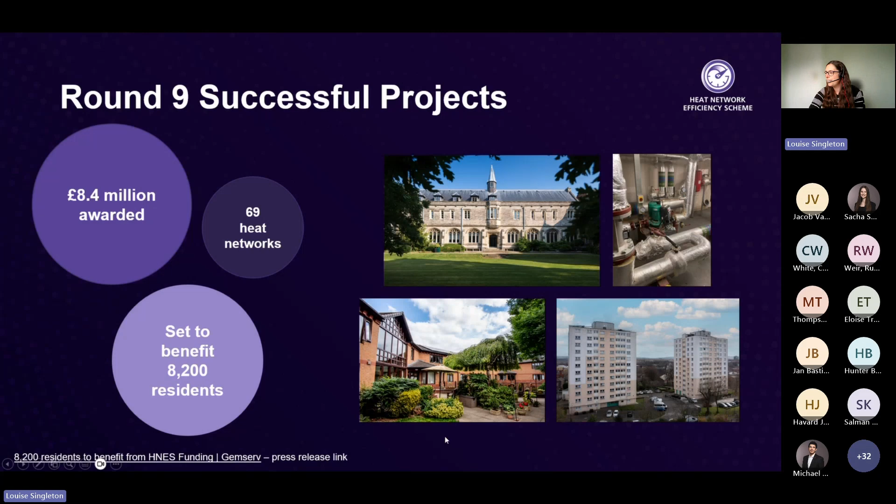Good afternoon, everyone. I'm the Operations Director for Seascape Management Limited. In January 2024, we completed a major heating system overhaul in both the properties we manage.

I'm going to walk you through how we turned what was a very significant expenditure. We're around about £500,000 a year turnover residential management company for 148 apartments across 2 buildings. We'd already done the heating system in one of our buildings prior to us being aware that grants were available. That was a downside in one way, but in another way it gave us some very useful information in order to get the funding.

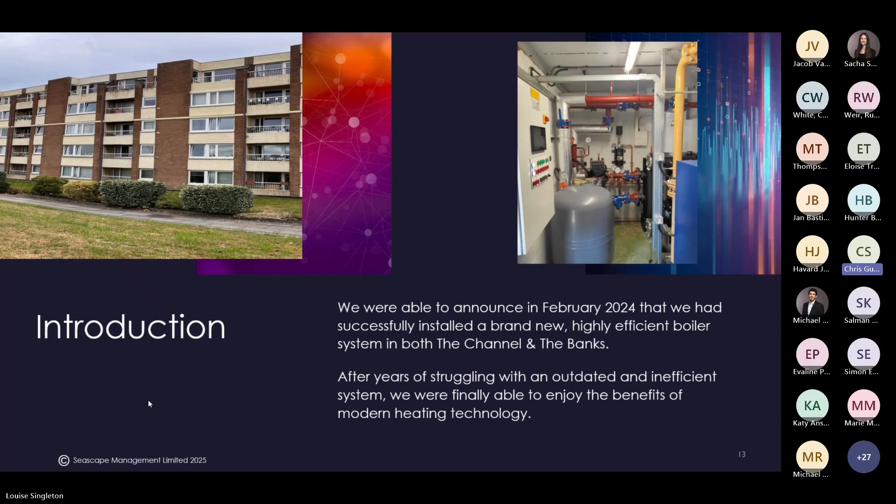So the two buildings, the channel and the banks. The problem we had in both buildings was that the systems were around 40 or 50 years old, very inefficient, and forever breaking down. We needed to upgrade them, and it was a clear-cut case that we couldn't do a partial replacement. They were beyond economical repair, and so when we were talking to our leaseholders, who are shareholders of the company as well, it's a leaseholder owned building, they are leaseholder owned apartments. It was clear that we needed to go for a new system.

This was also the time when gas prices were absolutely rocketing due to various issues, and it was felt that we needed to do it sooner rather than later, so that the money could be invested in new systems and not in the profits of gas companies.

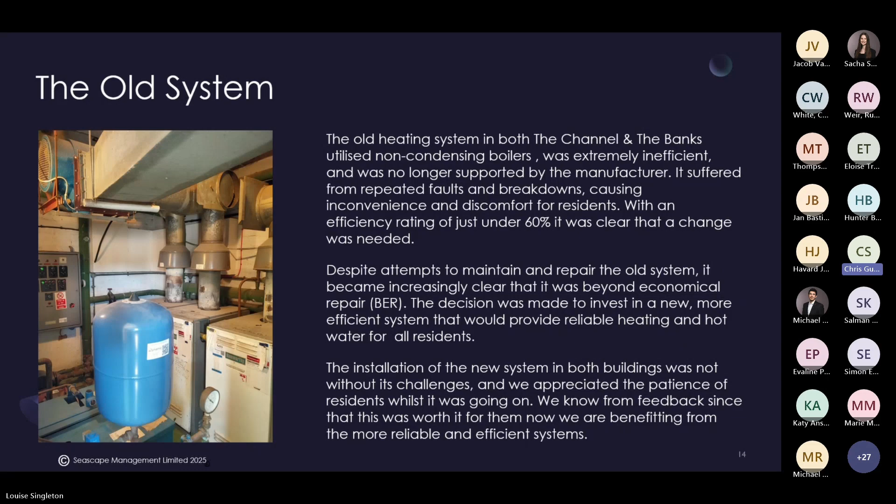Our solution was to invest in a new highly efficient condensing system, and it's got an impressive 95.6% efficiency, which was a massive leap from the old system, which had sub 60%. But also we're looking at this from our perspective - that was the key thing for us, to be able to provide a good service for our leaseholders, a reliable and cost-effective service, but also to look at it from the point of view of our carbon emissions. We wanted to get the best we can.

We looked at other options, heat pumps, ground source, etc., but when we had an independent assessment done, it was felt that because of our situation, an efficient gas-based system was the best way forward. That study was very helpful in us applying for the grants, because it showed that we had looked at other options before we went down the route of gas powered.

As part of looking at the new system, I'd say this is a key thing for people going forward: look at the wider opportunities.

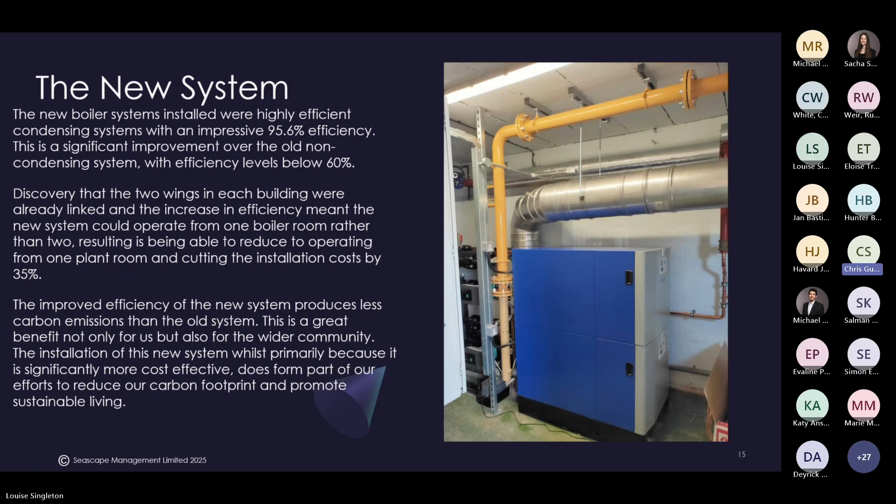We issued our Section 20 notice for both processes in 2022, and then the HNES grant application was done after the installation in the channel, because when we did the Section 20 notice, we weren't aware that grants were available. Once we found that out, we started the process, but we didn't want to hold up the installation of the channel, because gas prices were going up.

At the end of September 2023, our gas prices increased significantly. Phase 1 of the installation of the channel went live on June 6th, 2023. Phase 2, the banks, in January 2024. We were quite rapid with the next phase, because we'd done so much work on the channel, knew a lot of the issues we might have, and were able to deal with them.

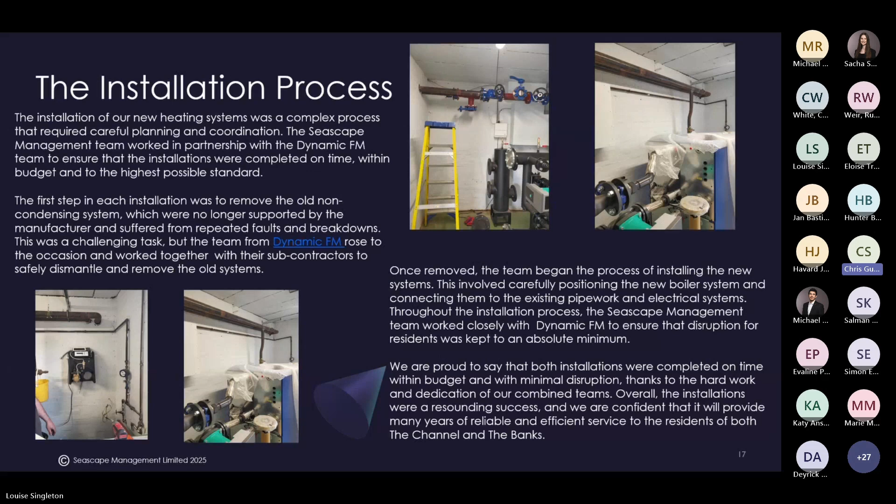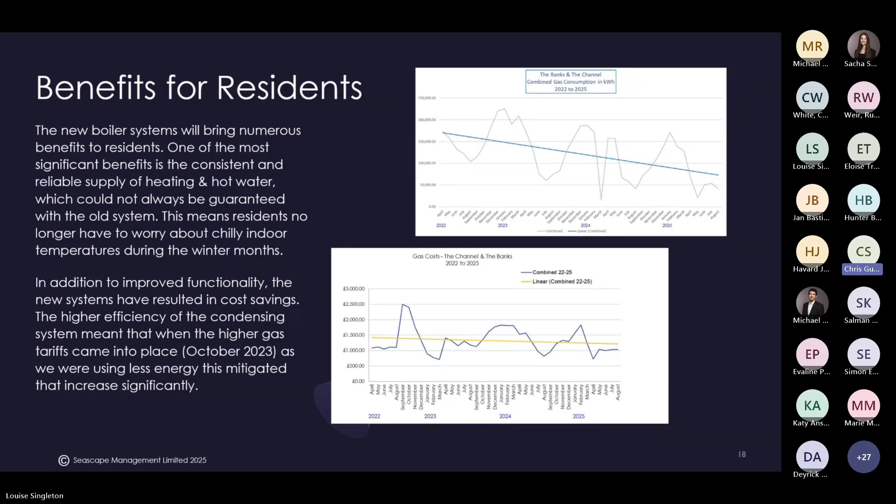In summary, we were successful in getting the HNES grants, which amounted to £28,500, reducing the overall cost across both systems to just over £260,000. That was a major help from our point of view in terms of the payback and the cost for our residents, and also allowed us some headroom to do some other work around installing solar in the channel, which is nothing to do with this grant, but it gave us headroom, and we are now reducing our costs for electricity as well on that one.

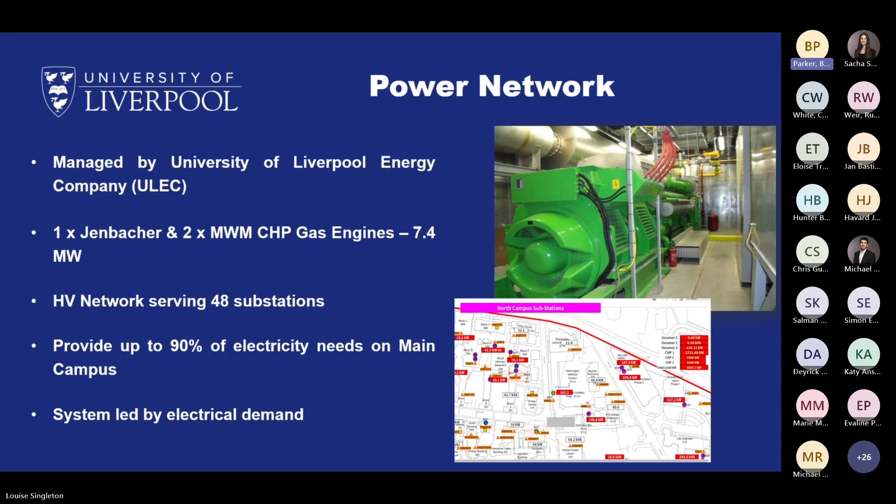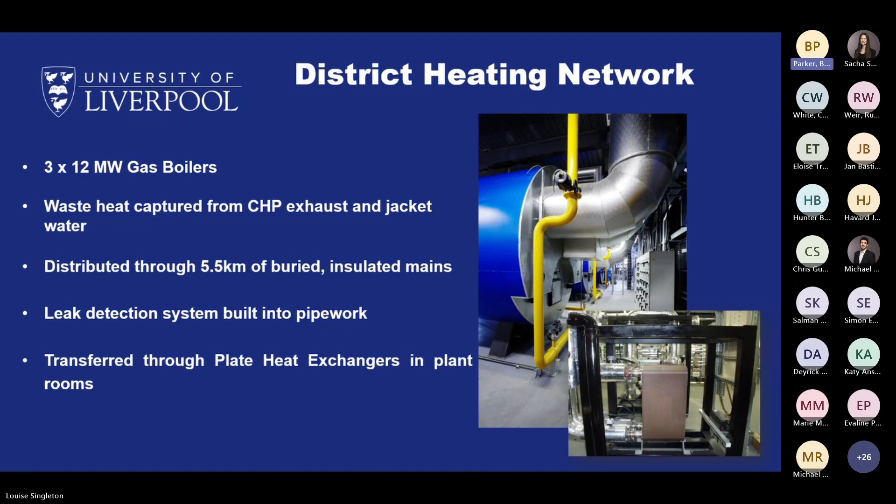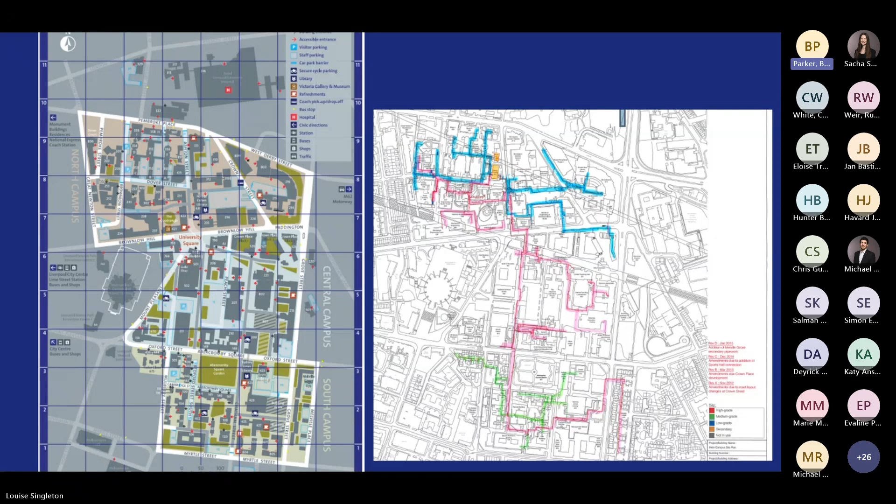In terms of the benefits of CHP, when we ran the figures, we realised we were saving about 7,000 tonnes of CO2 each year just by the efficiencies of generating our own power and capturing the waste heat. Also the cost, 20% cheaper to generate our own electricity and capture that waste heat. A bit of a no-brainer - obviously quite a bit of investment to get it up and running, but we've seen savings year on year for the past 15 years.

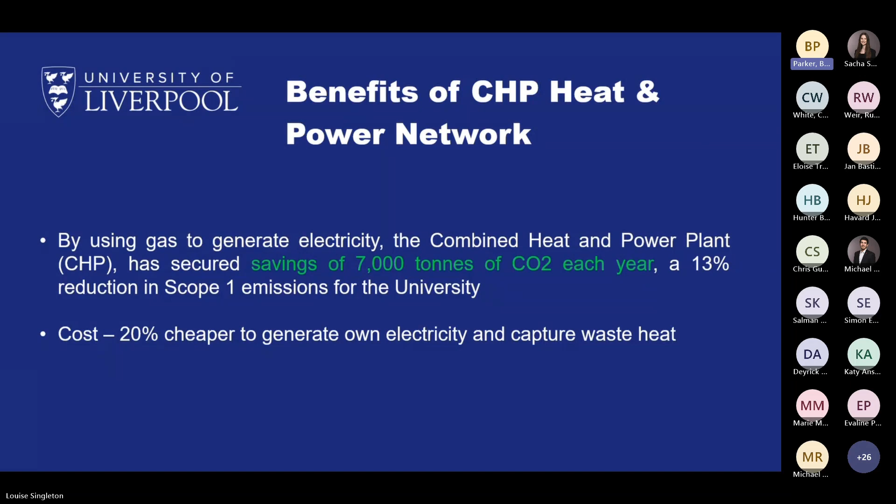So why do we want to improve heat metering coverage? I think one of the things at the university that hasn't been a driver is keeping regular, accurate heat meters. Obviously when you're an electricity supplier or gas supplier, there's a legal requirement to keep that meter maintained and up to date and accurate. On your own heat network, not necessarily those drivers exist.

So we knew that coverage was patchy. We wanted to improve that - to help identify inefficiencies in the system, any high returns, things like heat losses we're finding, and flow imbalances.

We also wanted to use that extra information to provide evidence for investment. So if we could see a heat plate exchanger wasn't working, taking the heat, we'd have good evidence to suggest that it would need to be replaced. And when we're applying for capital funding, we were able to demonstrate that.

Because we're managing our own power stations effectively, we've also got a big compliance burden in terms of providing accurate information to the likes of the Environment Agency and UK ETS. So for our compliance, and also for monitoring how we're doing on our net zero targets, it's also been important.

One of the things Louise mentioned earlier was about the standards for networks in terms of monitoring and data. We've also got the HNES guidance, which gives us a lot of information about what the data coverage should look like, but also getting ready for the heat network technical assurance scheme is important. Obviously it won't apply to existing networks initially, but that is coming in, so we're trying to prepare ourselves for that.

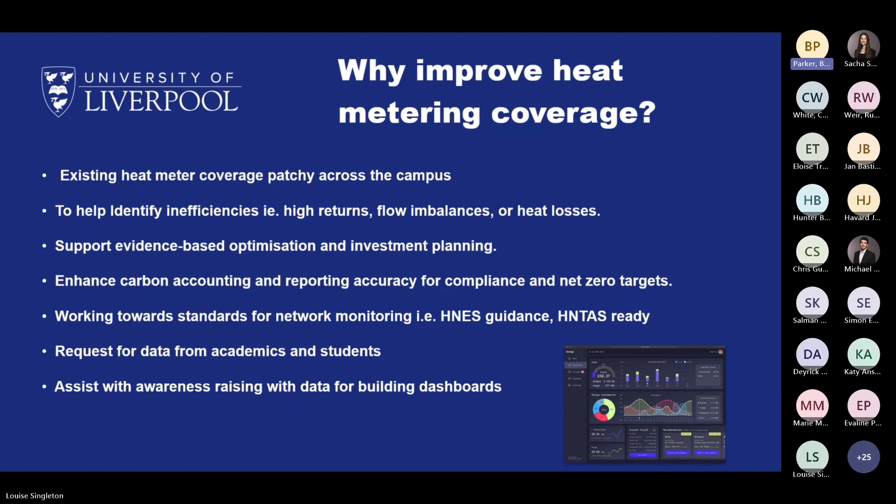So what did we actually apply for? We applied for 6 heat meters in buildings that didn't currently have good metering coverage and no data. Total cost of the project was 147,000, just shy of 148,000. The total amount we got awarded by HNES for that was 72,000, so roughly half of that cost, and we match funded the rest.

In terms of the time taken, it was about 9 months - started in November '23, completed in July '24. I think some of the hold-up we had was internally making sure we had that funding available. There were a few different boards that it had to go to, which held it up slightly.

So in terms of what we specified, obviously heat meters are very different to your traditional gas and electric meters. We'd already had Endress&Hauser meters on campus, and found that they were really good. The actual heat meters themselves are MID compliant, that level of accuracy. When you're doing heat meters, it's three elements: the meter itself, the thermometer to measure temperatures, and the flow meters.

What we found really good about using Endress&Hauser was they had comprehensive maintenance and calibration, so every year they come and do that. We can also monitor all the instruments through the Netilion portal, so we can see when a meter is becoming obsolete or needs updated calibration - keeping on top of the meters and making sure they're all accurate and working properly.

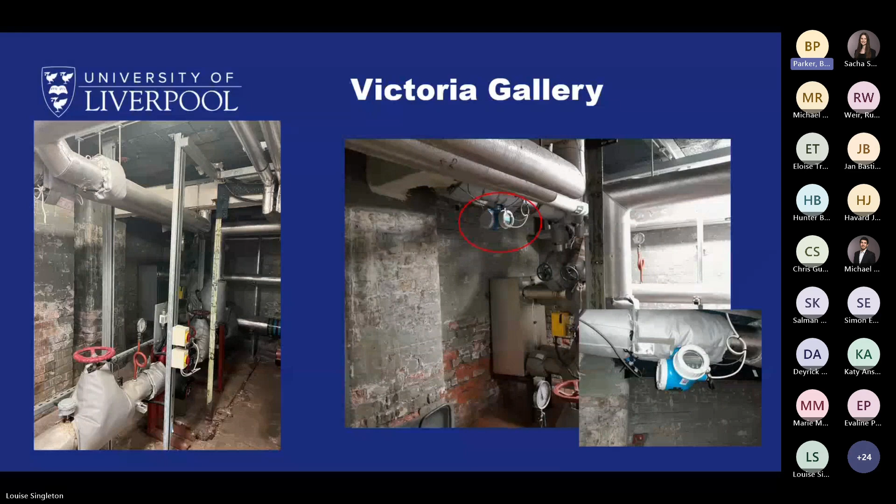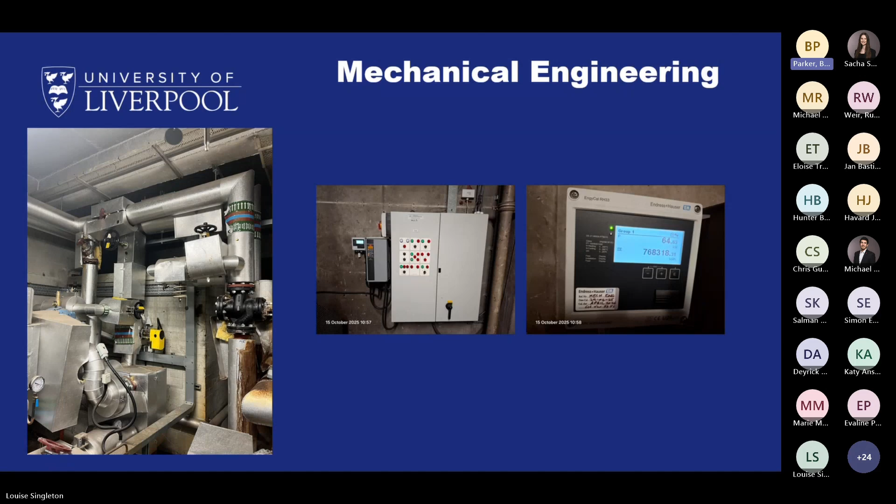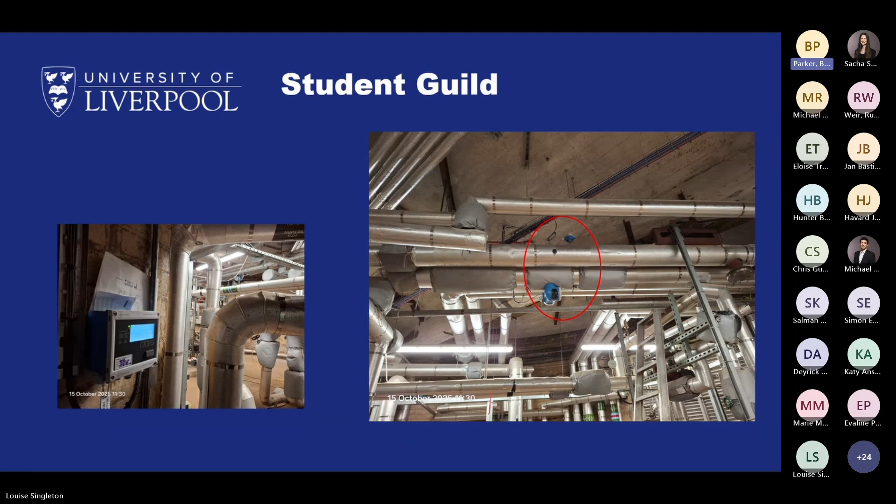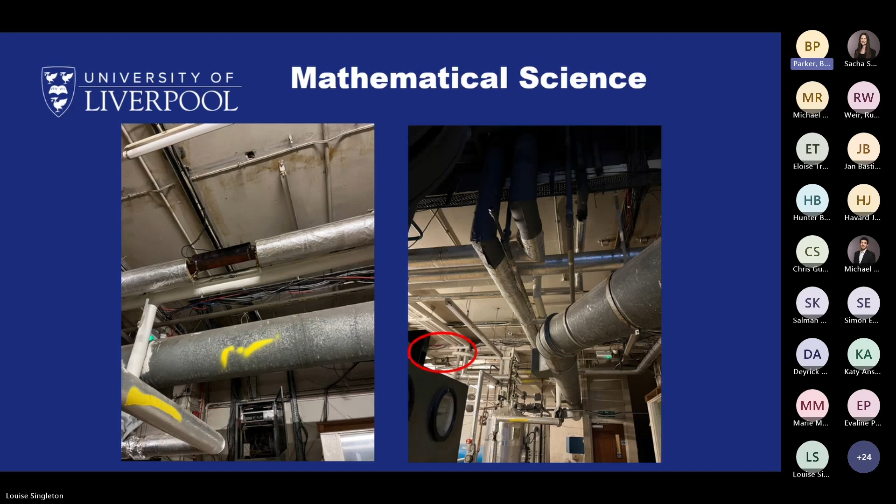In mathematical science, there was already a heat meter in there. You can see on the left-hand picture it was defunct - it was actually in the wrong place. So we found the area ringed on the right-hand side to replace that, but again, very high up. We managed to locate the heat meter itself in terms of the readouts at a low level where it can be read, although the flow meter and the thermometer are high up.

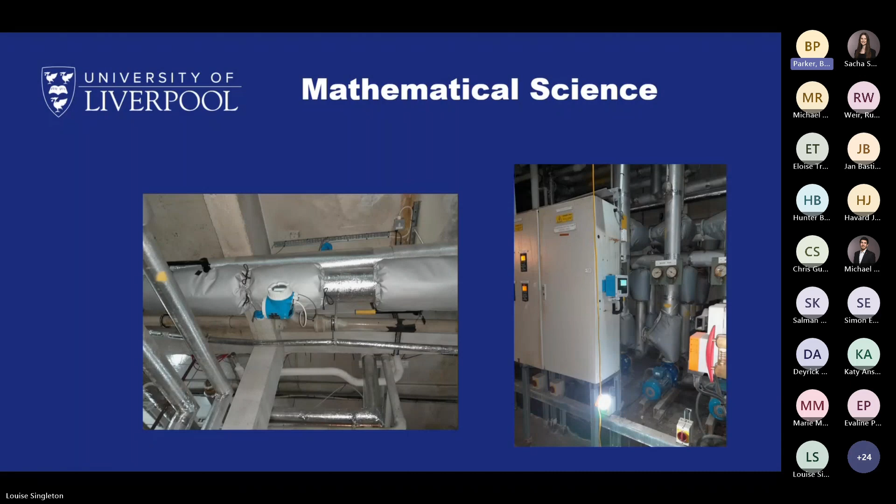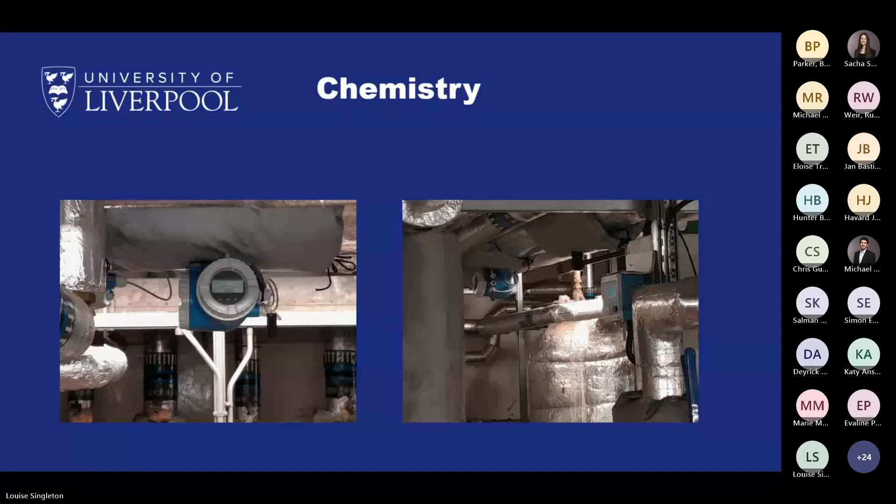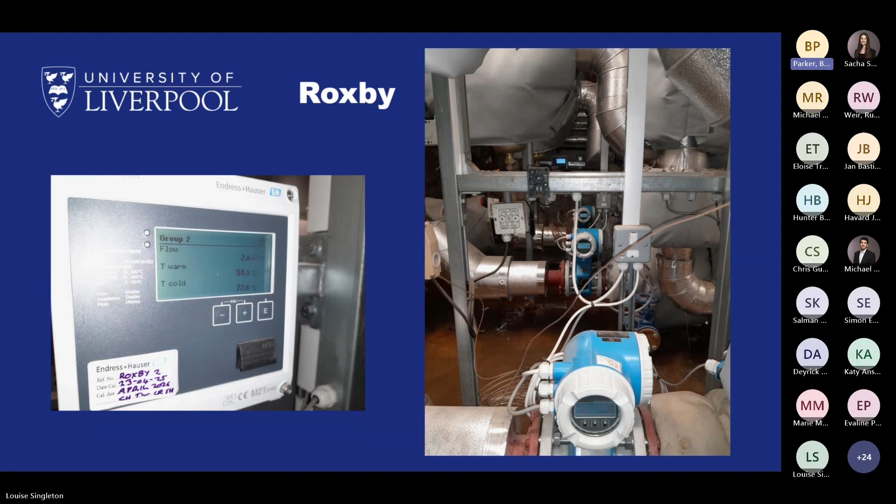So yeah, challenges in installing the meters. I've covered a few of them in those slides.

Obviously they are more complex than traditional gas and electricity meters, so a lot of planning needs to go in about where they're going to be located, and that's sometimes to do with making sure you're measuring the correct pipe that has got that building level heat in it. Having a suitable run of pipe and making sure it's a required length can be a challenge.

Also getting power to the meter as well. You need to look at your schematics for your electricity to see how you can power that meter. Have you got a supply nearby you can tap into?

And in terms of the data capture, we were doing it through our BEMS system. So when we were looking at doing the planning, we wanted to see what local JACEs were in those plant rooms to connect to, so then we could send it to our BEMS system and then send it to our energy management database.

But one of the things that we found, unfortunately, because we've had to put in so many high-level heat meters in terms of high level in the plant room, the annual maintenance costs did increase quite a bit because each year we have to erect scaffolding to get those meters maintained and calibrated.

And also, like I said in some of those other slides, making sure the meter's accessible for manual reads, just to have that extra validation.

And the final point, I think it's common for any kind of works in old buildings and plant rooms - this is the asbestos angle, things like lagging, meter boards, all that kind of stuff. So we had a good review of our asbestos register before embarking on the project as well.

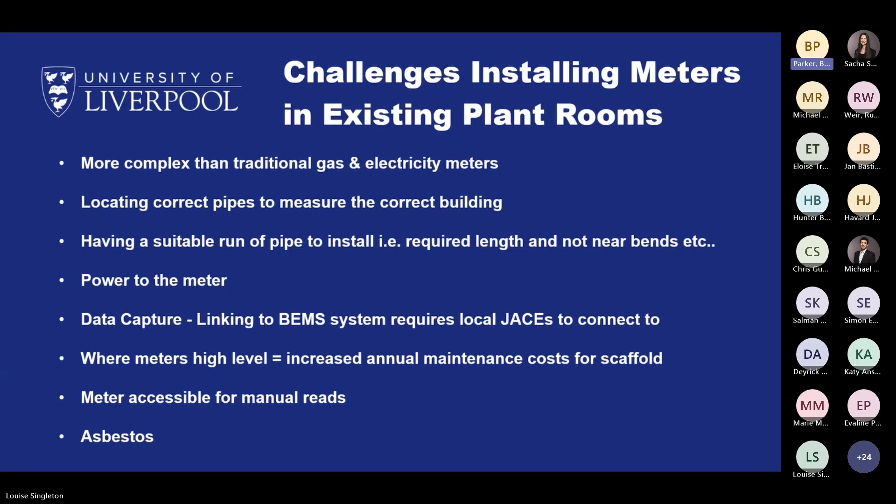So next slide. So yeah, it has given us really good improved data and visibility, particularly the ones we've chosen are for a certain leg within the campus that we didn't have much visibility of before. So we put it all into our BEMS system.

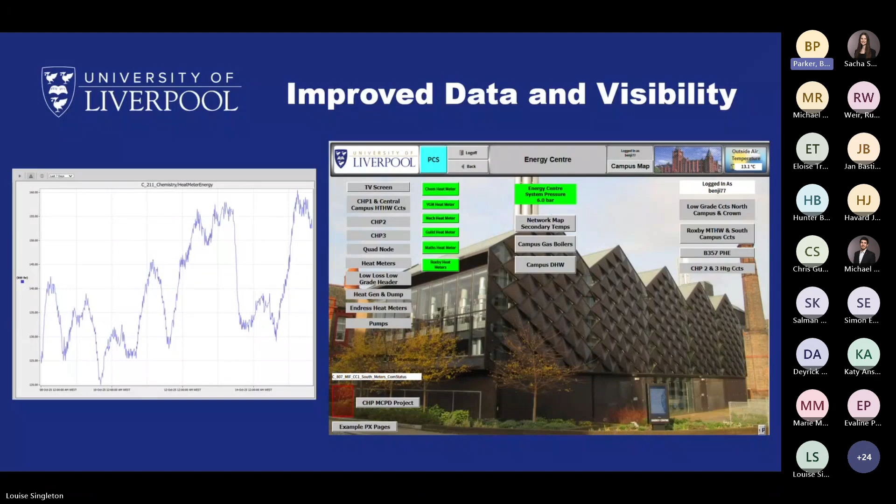So all the boxes you can see in green are all those new meters that we've put in. Next slide. And then we also send that to our energy management database.

And again, it's just allowing us to look at these buildings individually and see if there are any issues, in terms of peaks and troughs or patterns that we can look at to analyse and make the system work a bit more efficiently.

Next slide. Yeah, so overall the project has been really good, I think. Some of the costs for heat meters are quite high compared to traditional metering, but we thought it was very worthwhile to get ahead of the game in terms of compliance, in terms of the heat meter notifications, the heat network technical assurance scheme.

So we've also, on the back of this, recently applied for HNES funding for a revenue fund to have a look at an optimization study.

And then once we've done an optimization study, we're looking to use the results from that and the recommendations that come through for a further capital funding project as well.

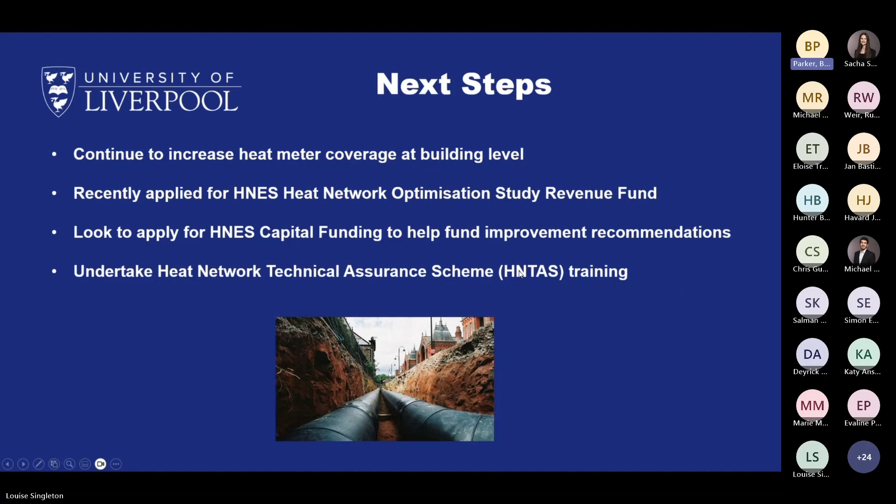Thank you very much, Louise. That was really interesting as well, to see the value of having data and being able to understand how your network is performing. Yeah, absolutely. Thank you. That's all right.